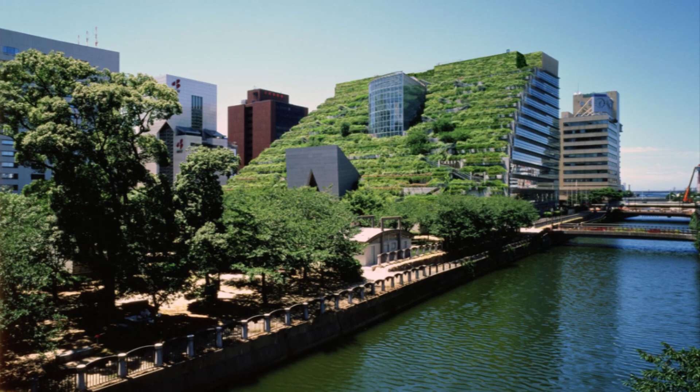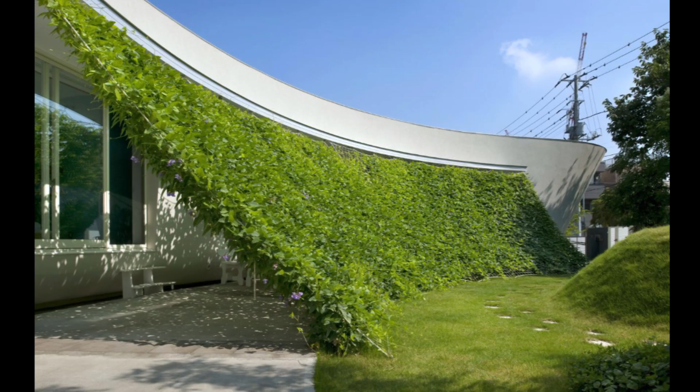As the architecture profession hurtles into a period of green building, many architects, clients, and now the public at large are becoming aware that the green aesthetic that is marketed towards them is largely superficial. The realization of the superficiality of greenness has manifested itself in the term greenwashing, which broadly describes the marketing frenzy that has managed to label products as environmentally detrimental as bottled water and gasoline magically safe for consumption, without long-term consequences.

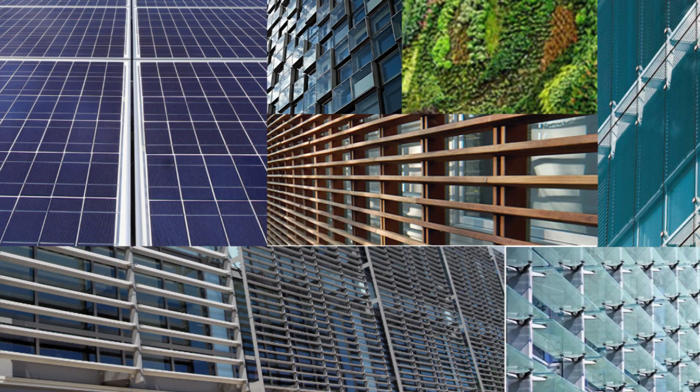Greenwashing in the architectural profession has often been used to describe elements such as double-skinned facades, louvers, green roofs, photovoltaic panels, and other superficial building elements that merely coat the surface of the building and communicate nothing about its deeper environmental impact. This current practice of greenwashing by means of slapping on additional elements of louvers and green roofs demonstrates that the profession's current approach to dealing with energy in architecture is always additive.

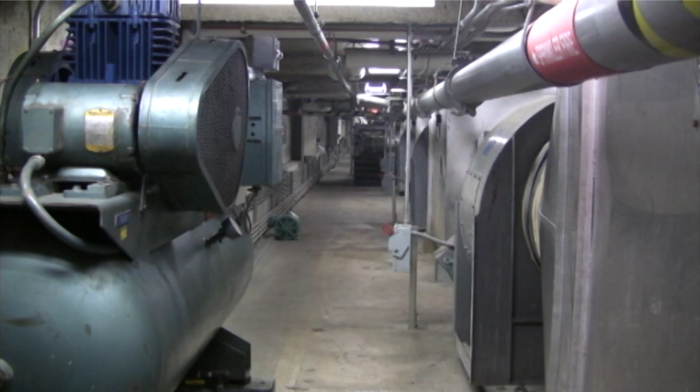One always starts with the same energy hog of a building and simply adds things to it in order to make it greener. Accordingly, in this additive practice, we complicate the issues of energy and climate far beyond the level that they need be considered. Our buildings become convoluted and complex contraptions, which occupants cannot understand or interact with, leading to a hopelessness about climate change as an issue far beyond their control.

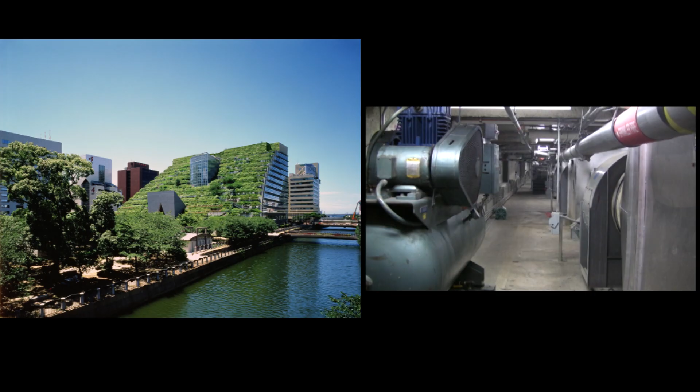Looking at these cases that complicate the issue, one feels compelled to ask, how in the world do these situations happen? The answer lies in the current design paradigm, which we can imagine as a system of feedback loops, in which each turn of the loop represents an iteration of the design. Typically, an architect will start with some type of external inspiration, whether this is a response to the work of their contemporaries, a notion in philosophy that is of particular interest, or a vision shared by their architectural firm.

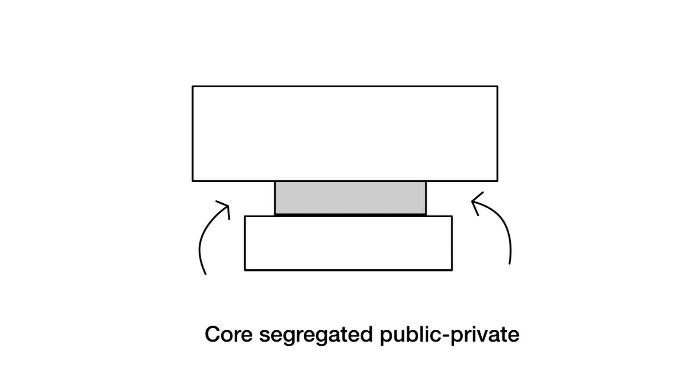When this inspiration results in the realization of a design opportunity, a building parti is born. Alternatively referred to as the big idea, the parti is the chief organizing thought or decision behind an architect's design and is frequently presented in the form of a basic diagram or simple statement. Forming the core of the design process, the architect will frequently come back to the parti throughout the process to re-evaluate it.

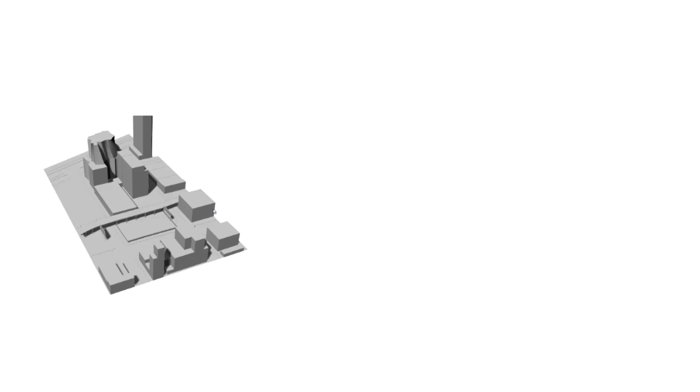Once a parti is established, the designer will bring in aspects that are specific to a client's project, such as the site of the project, the function that the building needs to house, and the aesthetics of the client's taste. The architect will present a design to a client numerous times throughout the design process, and with each design iteration, decisions are made and the number of possible future designs becomes narrowed down. On the other hand, this decision-making process has an increasing effect on the level of detail in the project, which rises exponentially in a positive feedback loop as more and more decisions are made.

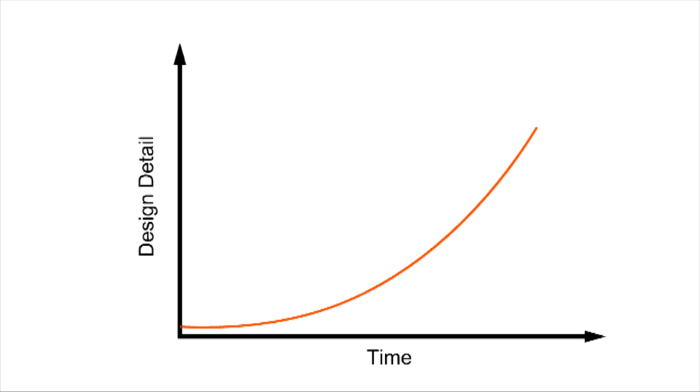In the current design paradigm, it is only after a certain number of iterations of this cycle that engineers and energy consultants are brought into the feedback process to address technical concerns. These consultants help in the final iterations of design, giving a small amount of feedback before signing off on a project for code approval and submitting construction documents.

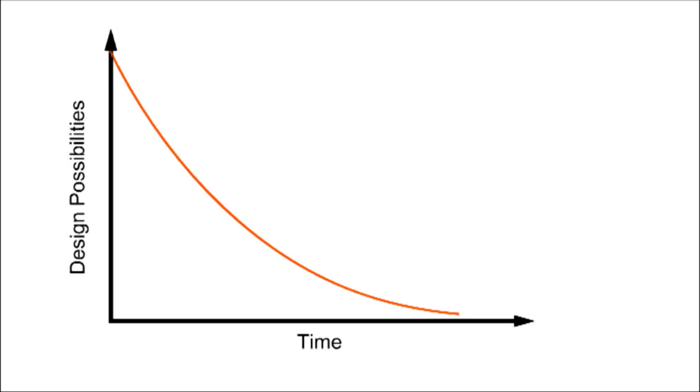Instantly, if one looks at this process, the reason for the current additive, complicating greenwashing paradigm becomes apparent. If consultants are only brought in at the end of the process, in the last few iterations when very few future design possibilities exist, all that they can do is add in shading and HVAC gadgets to a situation that is already doomed to be wasteful.

Thus, in order to ameliorate this situation and make smarter decisions earlier in the design process, the initial inspiration of the architect should come not from an egocentric vision or response to their competitors, but should relate to something found or discovered in the climate, materials, and culture of the location in which the project is to be built. Moreover, the technical consultants and the considerations of the site will have to be brought on earlier in a manner in which they can help legitimize some of the design opportunities seen in the inspiration and help shape the initial parti.

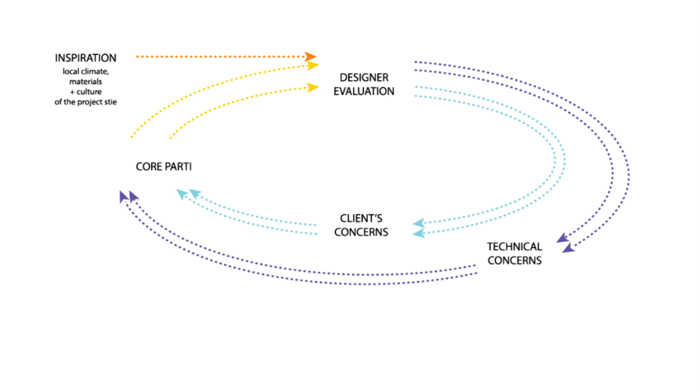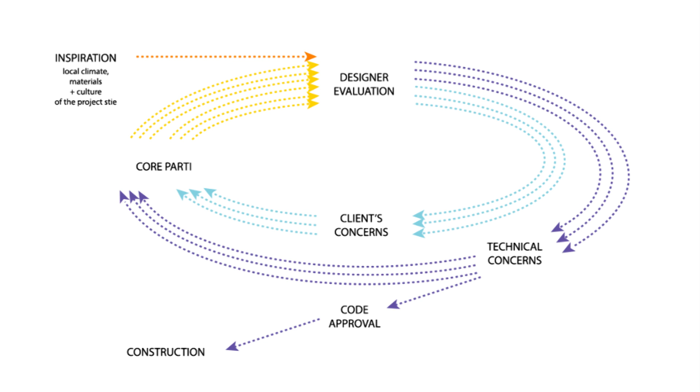Accordingly, instead of the layered approach of bringing in different concerns at different times, this new design process would involve a simultaneous engagement with the client, engineers, and energy consultants throughout the iterations until the final construction documents are produced. There have been many attempts to follow this new paradigm in recent years, under the banner of what the profession has termed integrated design. However, in the attempt to follow this paradigm, one instantly finds oneself in a predicament.

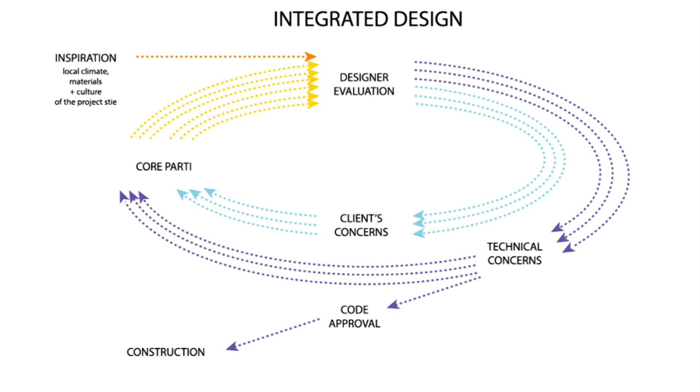This is that almost all of the tools and technologies that have been developed to date are meant for this older paradigm. The architect's tools are meant predominantly for the development of wasteful designs, while the technical consultant's tools are meant predominantly for the analysis of wasteful designs.

Furthermore, even when one tries to edit or adapt these old tools in order to be more creative with them and answer new questions, one often runs up against the issue of proprietary software, being unable to change or edit the code of these tools.

For this reason, a community of students, designers, and technical consultants have started an open source project to develop these badly needed tools using a radically different software development paradigm. Instead of the top-down development of the current proprietary tools meant for narrow applications to just a few situations, the current set of tools is being developed alongside their application, allowing for a diverse range of questions to be asked

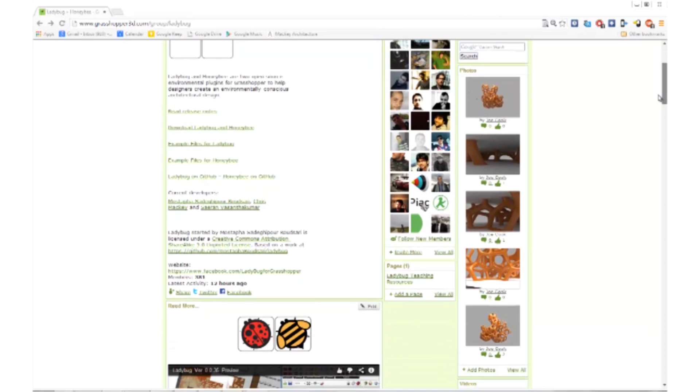and experimented with creatively. This simultaneous design and tool development is accomplished through an online community forum that includes coders, professors, and building scientists, as well as users who apply the tools towards creative projects, either in the real world as professional architects or as students in the context of architecture school.

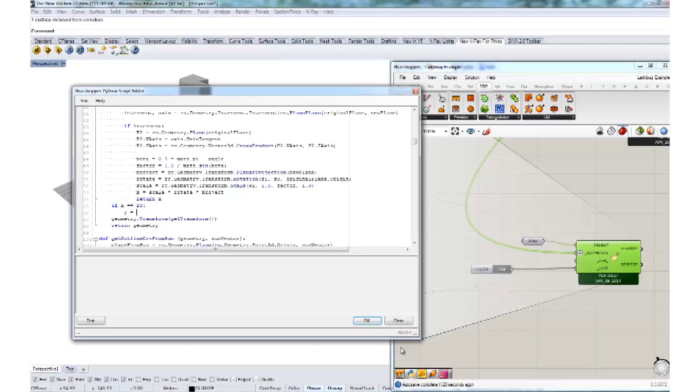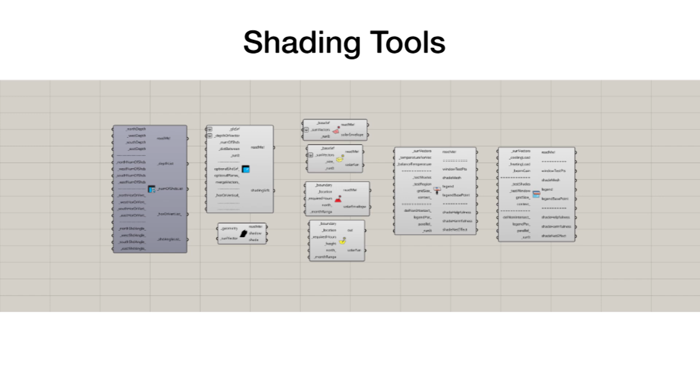There are also many individuals who straddle the line between these two as designers who, in the process of using the tools on a project, will simply open and edit the code of the tools or even make new tools off of the existing kit to use them towards their own unique creative ends. True to the nature of this distributed development process, the tools are organized as a set of individual components that can be linked together and recombined to answer new and interesting questions.

For example, two components linked together will import weather data into the interface, such as hourly temperature and location. Taking the location data from this import and connecting it to another component will draw a sun path diagram right within the 3D environment in which the designer works.

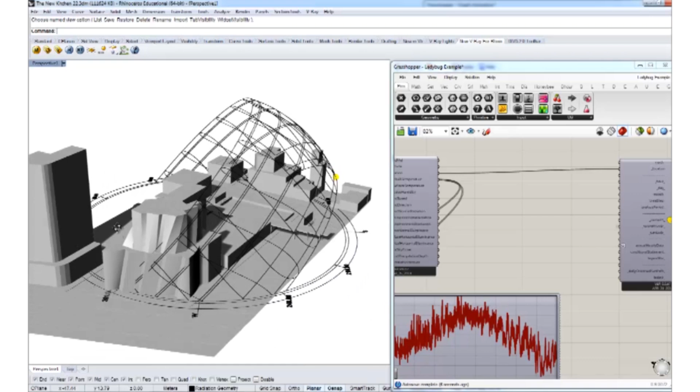Linking up another set of tools will show the areas of the sky dome where the most radiation is coming from and reveal design opportunities, like a band of bright sunlight occurring in winter, right at the time when heating load is most at its peak.

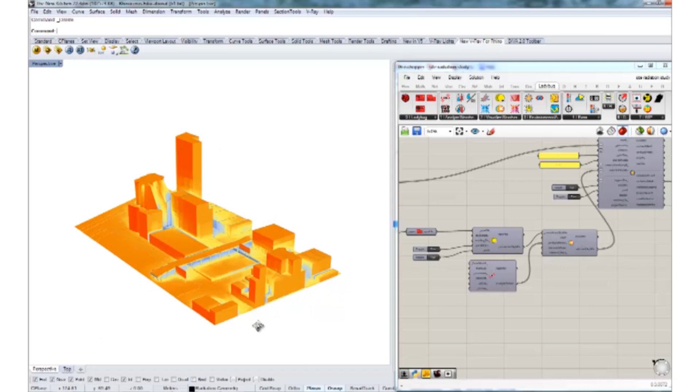Connecting another set of tools will show how this wintertime radiation falls over the existing site, and yet another set of tools will create the volume of a solar fan for this band of winter sun, showing the volume that must be clear of obstructions in order for the sun to reach the site of the proposed building.

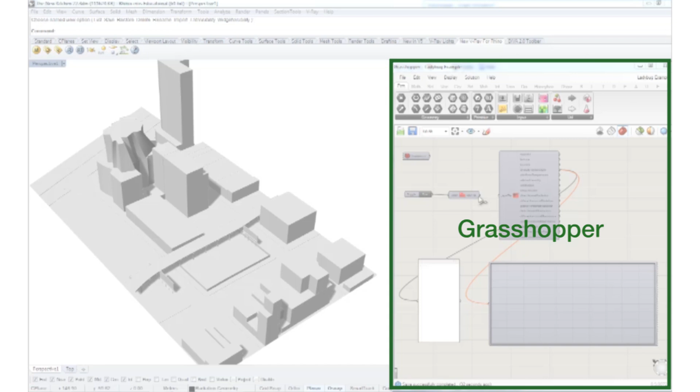As one can see from these examples so far, these tools are built with a plugin called Grasshopper off of the architect's primary 3D design software, Rhinoceros, and this allows for both an easy access in the design process, as well as the ability for energy consultants to run mathematical calculations and advanced simulations from the Grasshopper window.

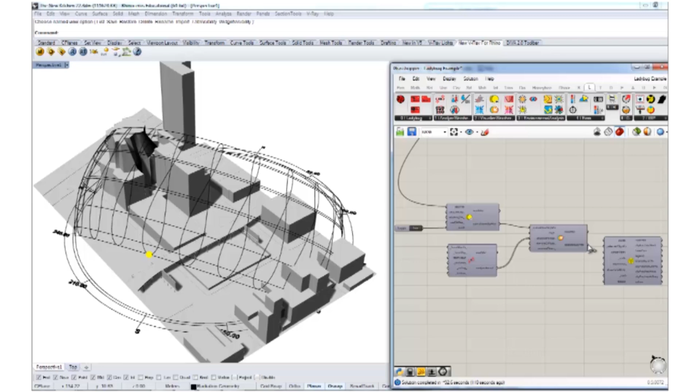As one can also see from these examples, the tools can help designers explore the climate and find sources of inspiration, like the band of wintertime sun that can be used for heating. This can then lead to design partis, such as a parti that captures and focuses this band of sunlight using reflective parabolic forms tuned to capture the sun at different hours of this band and reflect it onto a thermal mass that will store the solar heat for use throughout the cold winter night and day.

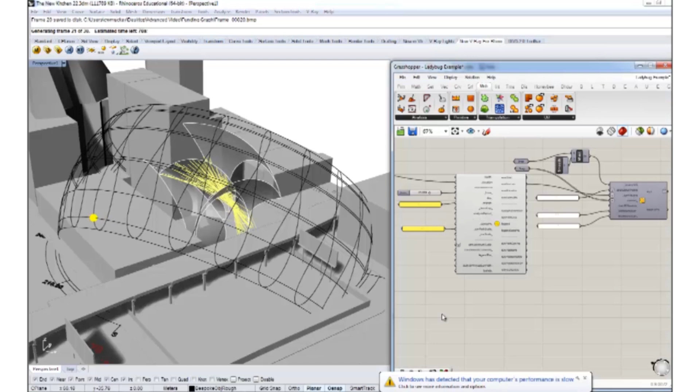The kit of energy tools also includes a means of quickly testing such parabolas for their focusing ability, such as a sun ray tracing tool, which will show how the sun rays are reflected and how well they can be focused. At the same time that the designer experiments with these fast analysis tools during design development, the energy consultants and engineers can run full energy simulations using another set of tools included in the kit.

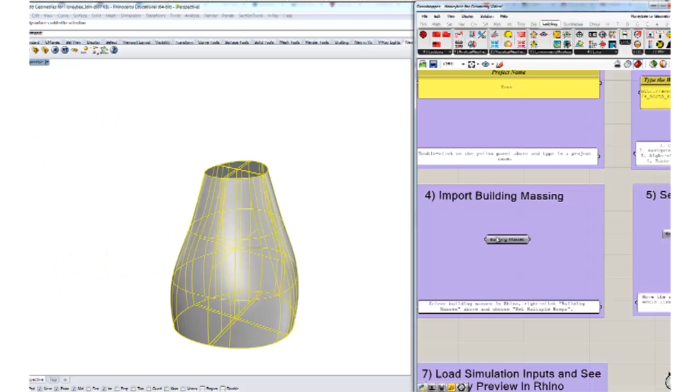It should be noted that these advanced energy modeling tools are built to run almost any geometry that the architect can dream up, unlike most of the current proprietary tools that favor simple forms such as boxes and gabled roofs. As the engineer ensures that the performative aspects of the parti are working correctly, the architect simultaneously can use the simpler ray tracing tool to ensure that the path of the sun remains clear as structural elements are brought in, along with the rest of the building's functions.

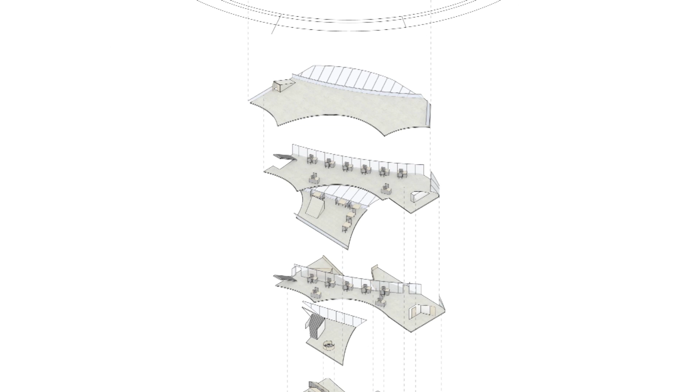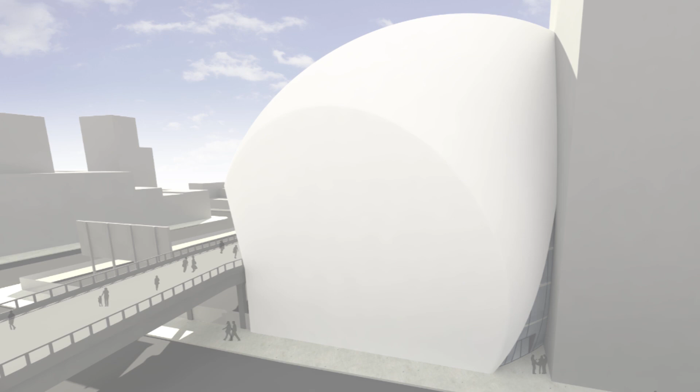Ultimately, this helps ensure a design that can technically make significant progress towards the elimination of a heating system in winter, while also allowing for the evocative aspects of a building that the designer and occupants cherish. This example is just one of many possible buildings that lay hidden in the inspiration of the local climate, and there are countless others just waiting to be discovered.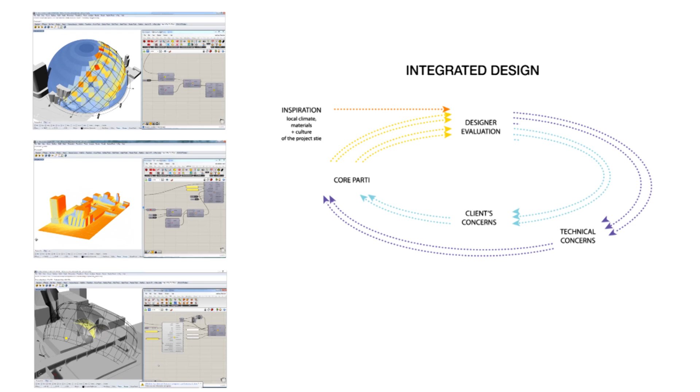With these tools and the impetus towards integrated design, there is hope that we can discover these new partis and move beyond the current greenwashing paradigm that merely adds things to wasteful buildings at the end of a design process.